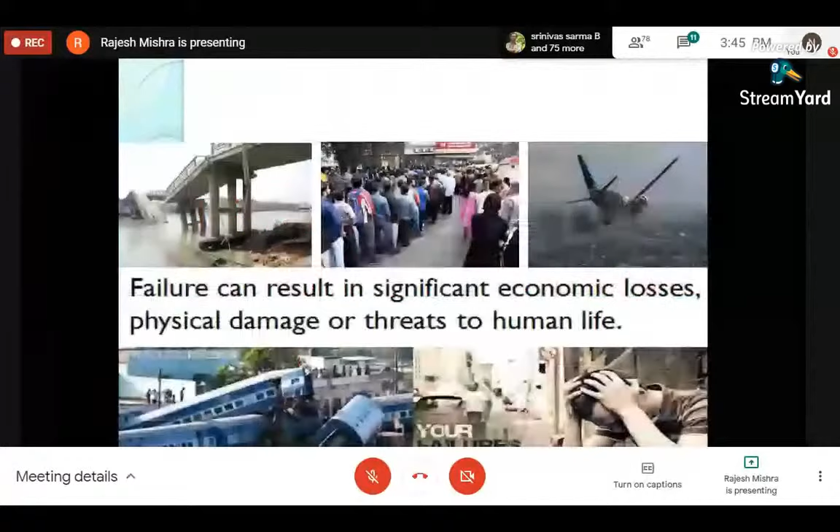In daily life, each of us observe bridges suddenly collapse, too much crowd on the roads, plane crashes, railway accidents, floppy disks not working, computers not working. Everywhere we can see these types of happenings.

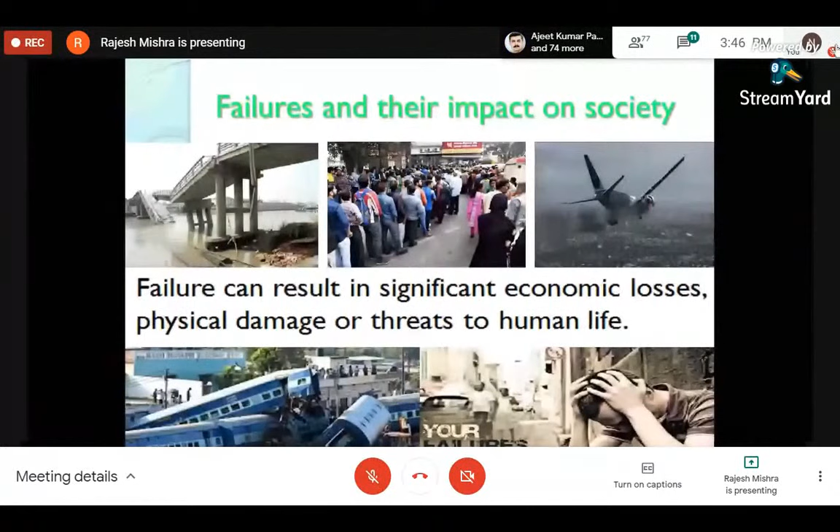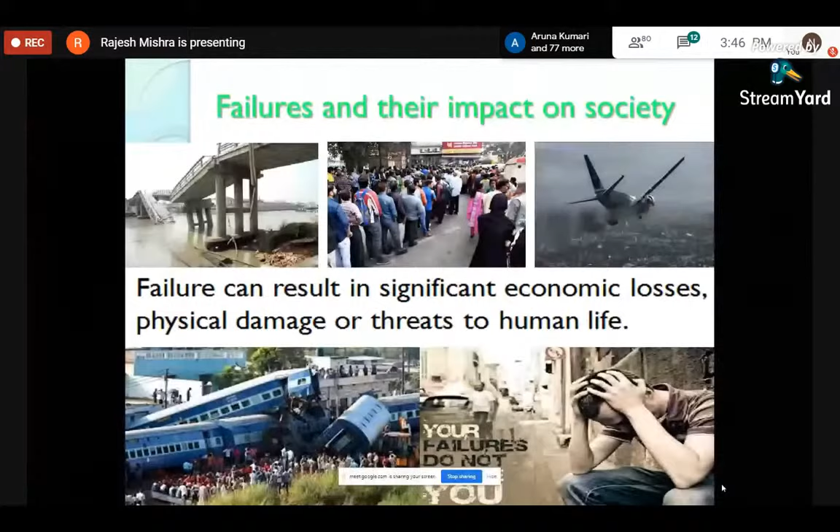Failures can result in significant economic losses and physical damages or threats to human life. The conclusion is everything on this earth has a finite life. The impact of product and system failures varies from minor inconvenience to significant losses, including death of many persons. These failures include bad engineering design, faulty construction, manufacturing process issues, human error, poor maintenance, and so many other reasons.

So the conclusion is everything on this earth has a finite life. We never get 100% reliability of the systems.

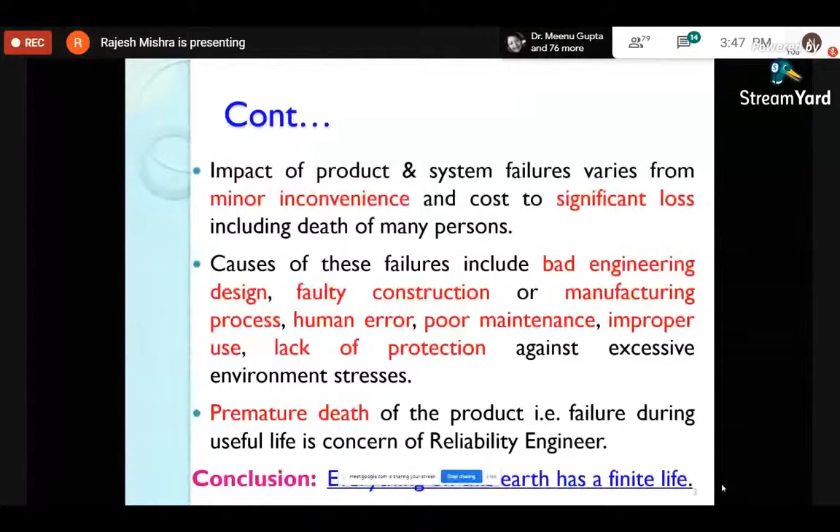The definition of failure is the termination of ability of an item to perform a required function within previously specified limits. There are two types of failures: soft failures and permanent failures. Soft failures are temporary failures, and permanent failures are hard failures.

There are causes of failures like human error, acts of nature, hardware failure, software failure, and so on. According to failure classification, we can categorize failures into two types. One is catastrophic failures - these are complete failures, or we can say sudden failures. Whereas degradation or wear-out failures are gradual failures, and these are partial failures.

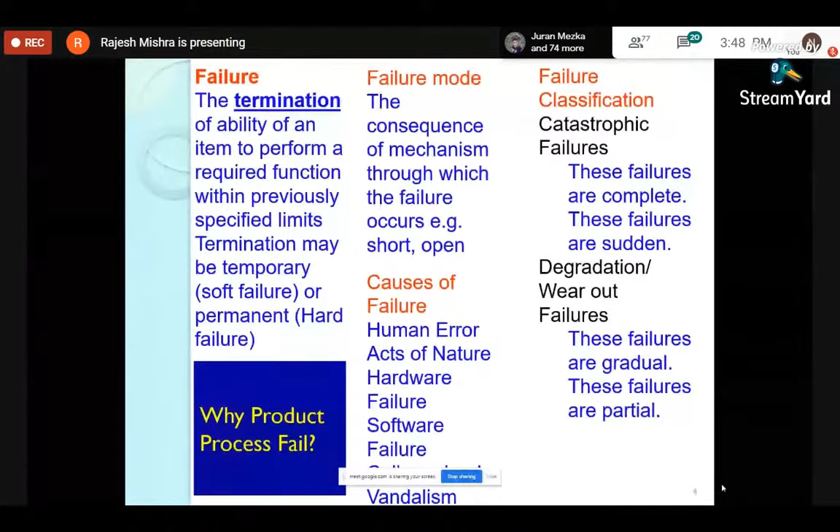So the question arises, why does a product fail? Then what can we learn from these failures? When an accident happens, what are the factors that can drive the learning process? How can organizations learn and change their policies, routines, and procedures through feedback from these failures?

The single term behind failures is stress. When stress is more than strength, the system will fail, and when strength is more than stress, the system will succeed.

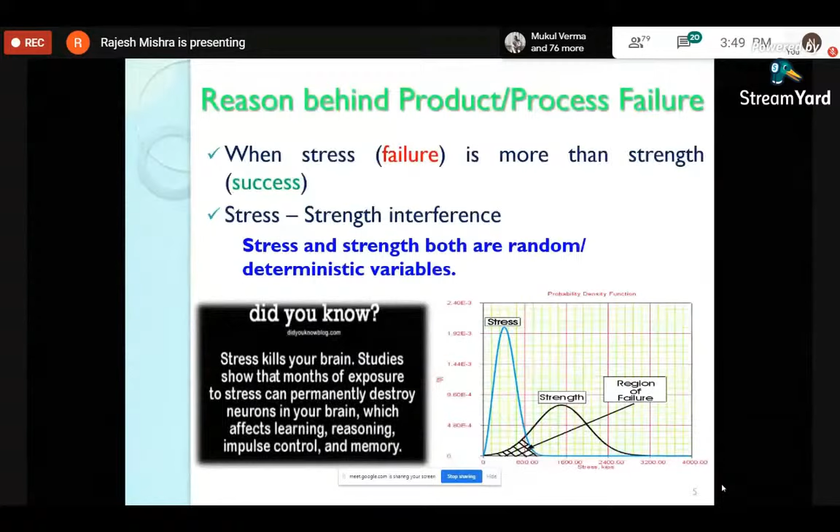There are various types of failures and reasons behind them, like poor design. Poor designs may result from wrong materials usage, wrong dimensions, tolerance issues, and so on.

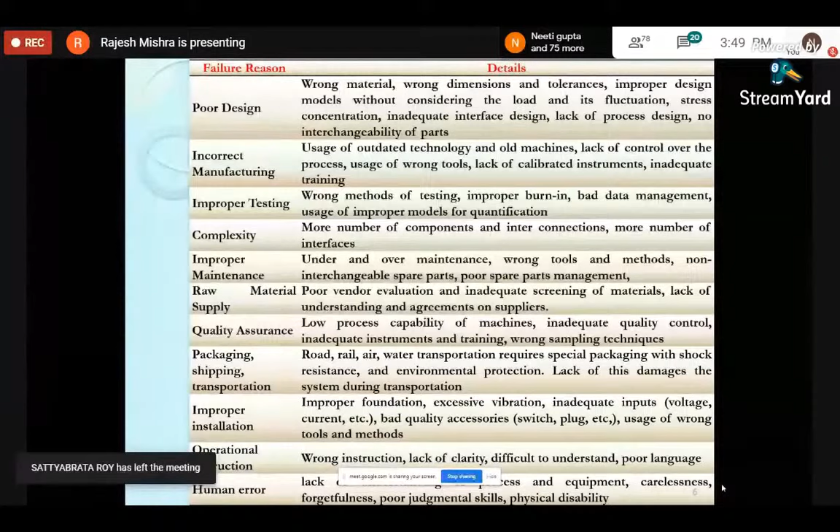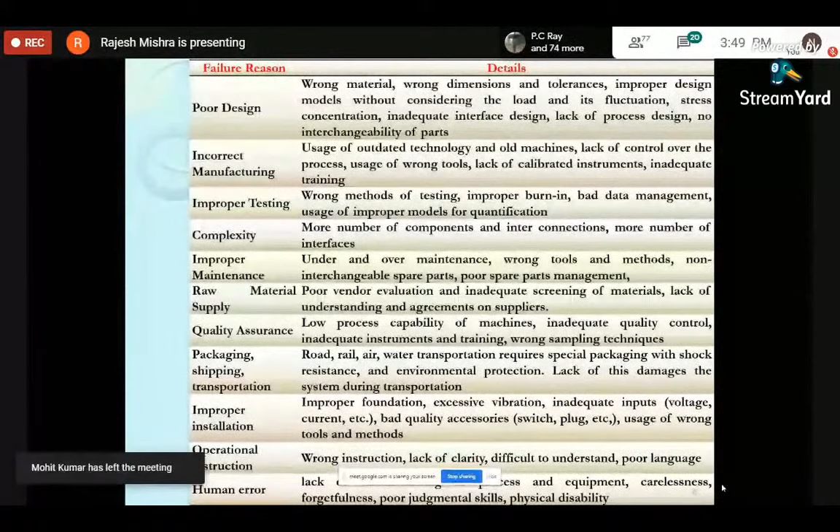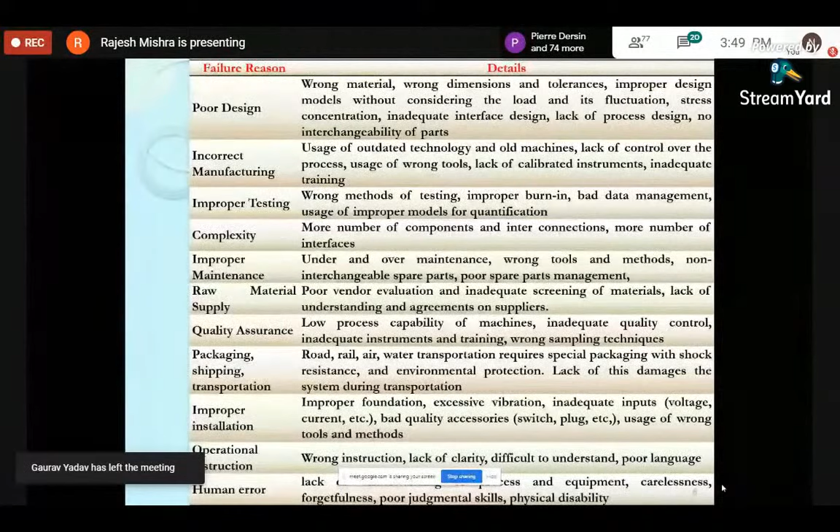Similarly, various failure reasons include incorrect manufacturing, improper testing, complexity, improper maintenance, raw material supply and quality assurance issues, packaging, shipping, transportation, improper installation, operational instructions, and human errors also. So these are the various failure reasons and their details.

At the beginning of the reliability era, the concept of reliability developed slowly until World War II. During this war, 50% of defense equipment was found to be in a failed state. The major role in failure was vacuum tube failures. So for the first time, reliability was born as a branch of engineering in the USA in the 1950s.

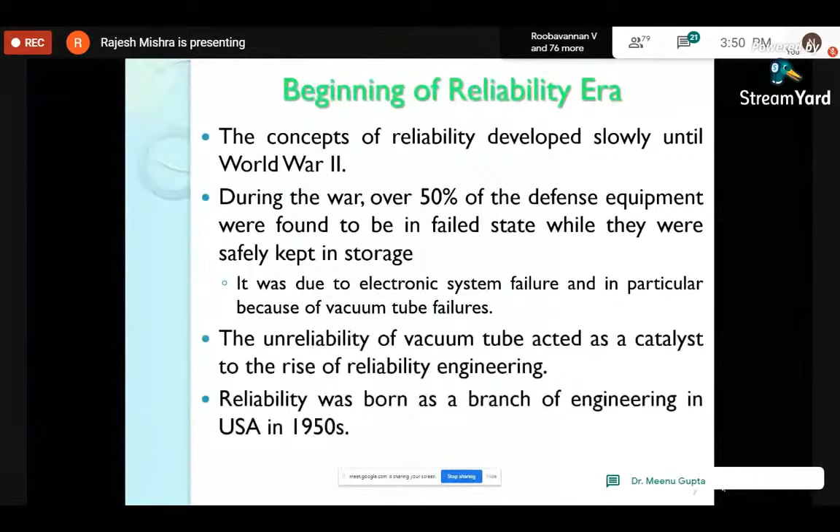System reliability can generally be classified into two categories: one is software reliability, the second is hardware reliability. Software reliability generally refers to the departure of programs or operations from user requirements, whereas hardware reliability is the termination of ability of an item to perform a required function within previously specified limits. So generally, whole systems like medical science, civil, electronics, mechanical, any science background subjects or engineering background systems - both are dependent on hardware reliability or software reliability.

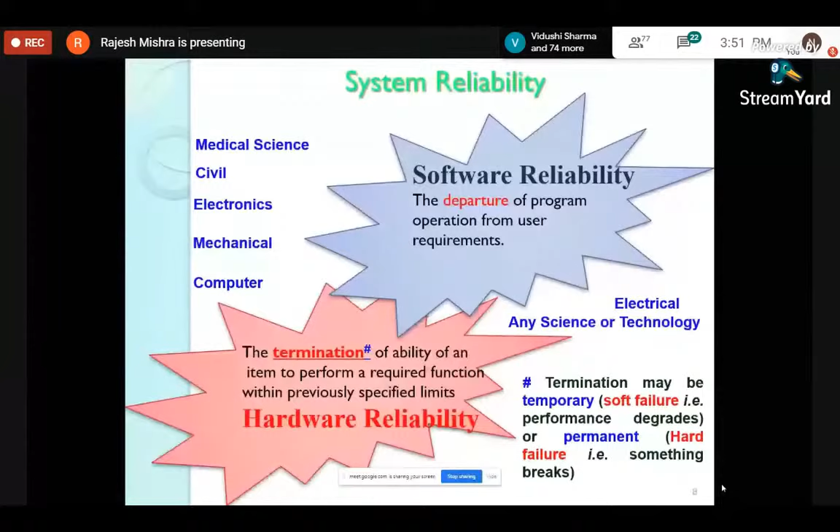So there are various failures and reasons. According to reliability, we classify failures by the bathtub curve, or life characteristics curve. These curves are the benchmark curve for the failures. This bathtub curve we can classify in three phases. One is the infant mortality part, where the failures are very many, whereas the second phase is the useful life failures. These are the continuous nature of the systems, and the final phase is the wear out failures, meaning the system degrades and finally goes to failure.

So as I discussed, software reliability and hardware reliability: the main difference between hardware and software reliability is the wear out phase. In software reliability, continuous degradation is not possible. The software is upgraded from time to time. So software reliability is generally a hypothetical type of work where nobody can see and nobody can measure the wear out of these types of failures.

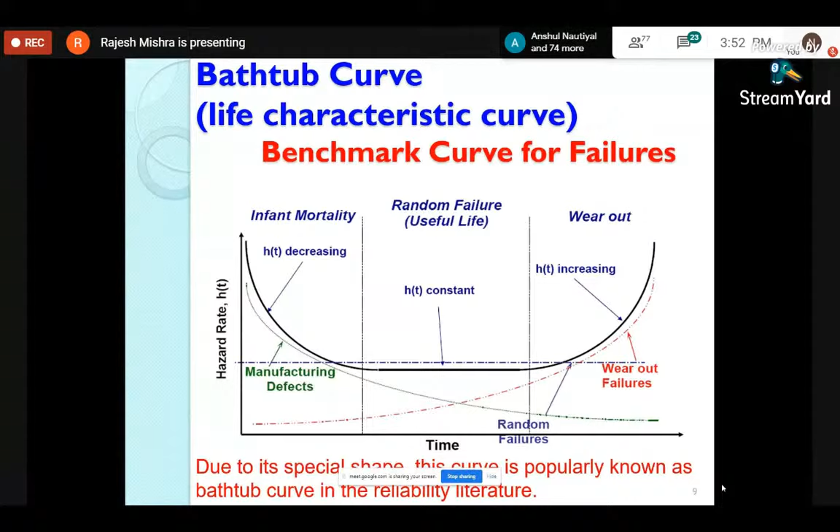So first, the term performability came from Professor K.B. Misra to improve the system reliability. Performability depends on dependability and sustainability, where sustainability is generally related to environmental conditions and time, whereas dependability is again classified into survivability of the systems and safety of these systems. The RAMS concepts came for survivability: quality, maintainability, reliability, security, availability, risk, and other categorizations are in the survivability portions.

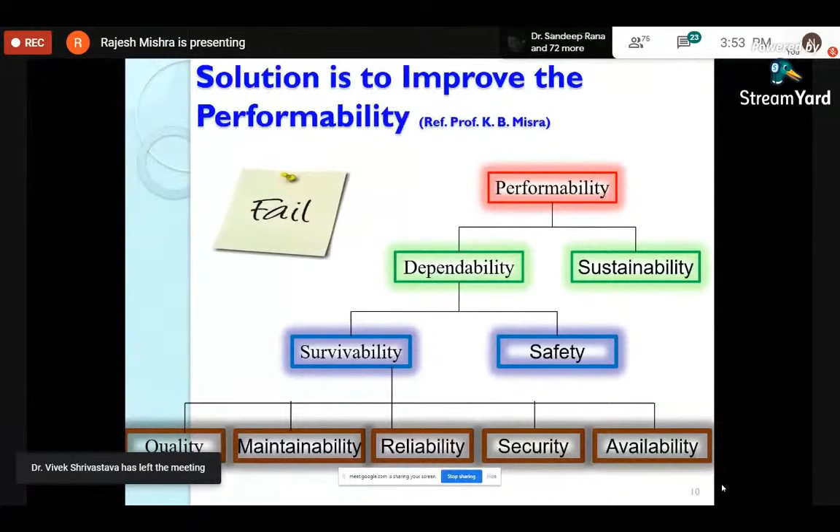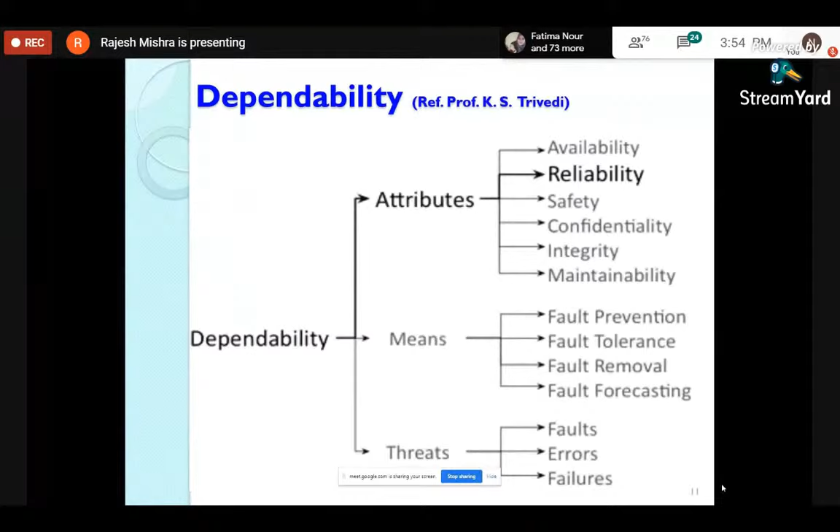Professor K.S. Trivedi simultaneously gave a dependability concept. The dependability concept is classified into attributes, means, and threats. So that is also an important part of reliability measures and evaluations. Now we come to the definitions of reliability. What is reliability, what is availability, what is maintainability, and what is safety?

So in two senses we can define reliability. In a general term, the ability of a system to perform a required function under given conditions for a given time interval. The precise definition of reliability is the probability that a system will operate without failure under given conditions for a given time interval. Whereas availability has a small difference from reliability. Availability means at a particular time the system should be available. In a general way, the ability of a system to be in a state to perform required functions under given conditions at a given instant of time or over a given time interval, assuming that the required resources are provided.

Similarly, maintainability can be defined as the ability of the system, under given conditions of use, to be retained in or restored to a state in which it performs required functions when maintenance is performed under given conditions using stated procedures and resources. The precise definition of safety relates to an event likely to result in death or injury of persons, significant material damage, or other unacceptable consequences.

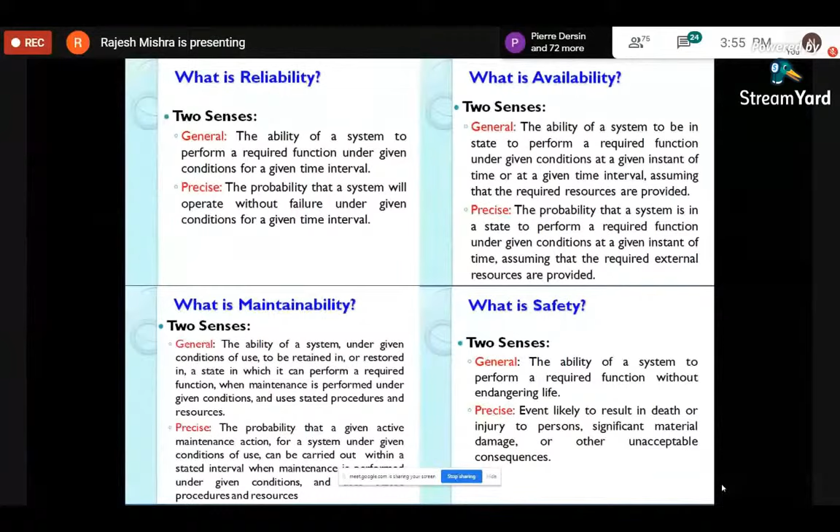So the first question arises: how can we evaluate or measure reliability? There are many statistical methods we can use for reliability evaluation and measures. These statistical measures generally require data sources, which we can get from the internet or live data. Similarly, there are various software tools for reliability analysis, developed by various companies.